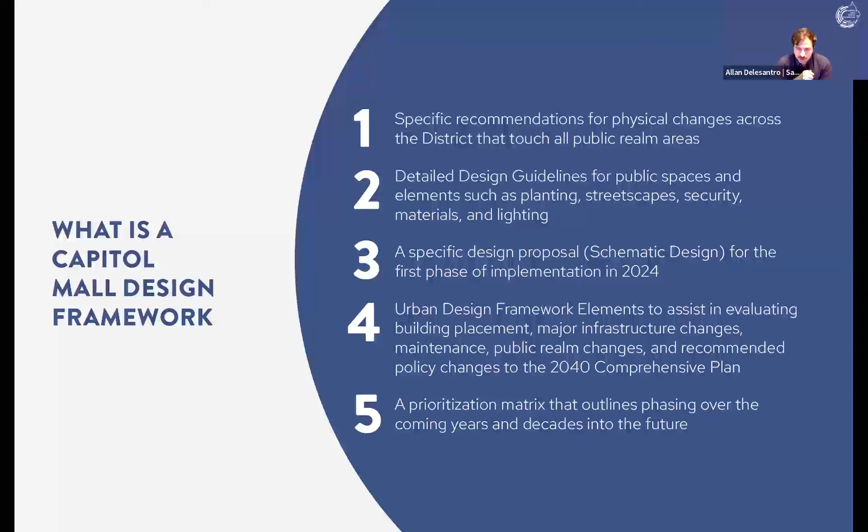We had spent most of our first phase, task one, learning and creating, working with local community members, government agencies, and our own analysis of the site to develop preliminary concepts.

We then took those concepts, presented them to the CAP Board, and got preliminary approval from them. We're now in a phase of showing those concepts to the state of Minnesota, to the community, and getting feedback from them through a survey that is now live.

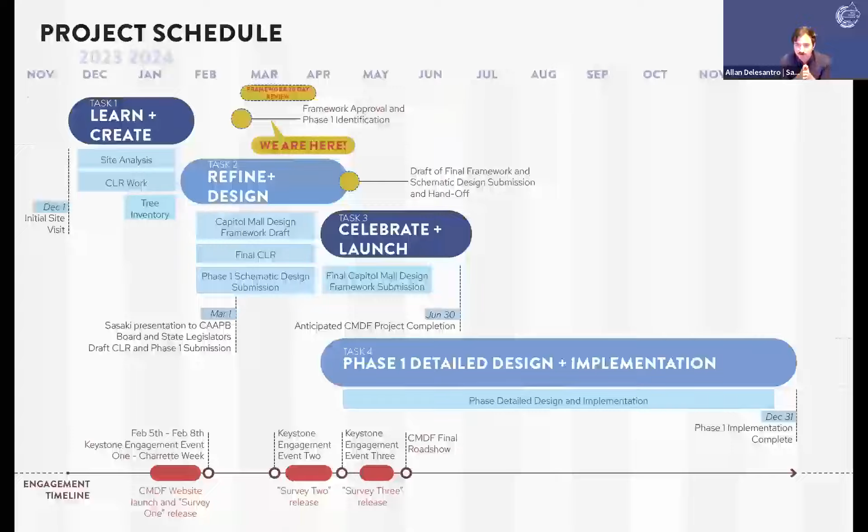This meeting that we're doing today is one of many meetings that we've done over the past couple of months to gather feedback and to better understand this place and how we can improve it.

So the engagement that we've been doing has many layers. We have been working statewide through surveys, a website, and youth engagement that will be going out to schools. We have regional engagement that has included pop-up events in the Twin Cities and other cities throughout Minnesota, like Bemidji, Duluth, Rochester, and Willmar.

We're also doing citywide engagement events within St. Paul and working closely with government agencies and local community members in design charrettes and focus groups. This is some images of those things we have been doing over the past couple of months.

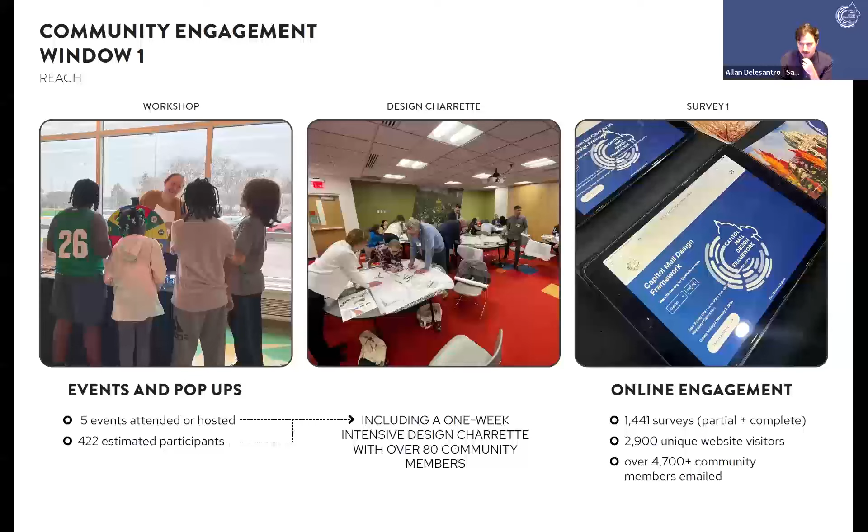We launched a survey in January, which got over 1,000 responses. That survey is closed, but we have since launched another survey, which you are all encouraged to take as soon as you're done with this virtual town hall.

These are some pictures from our community design charrette, which was an opportunity to work directly with community members in the Minnesota History Center, where we were iterating rapidly through different ideas, concepts, and solutions to the challenges that the Capitol area faces.

We need to activate it in better ways to make sure that it is lively through a changing seasonal cycle, as well as a day-to-night or weekday-weekend cycle. And we want to grow, meaning to add more plants, species, and just encourage a greater diversity in the ecosystem of the Capitol area.

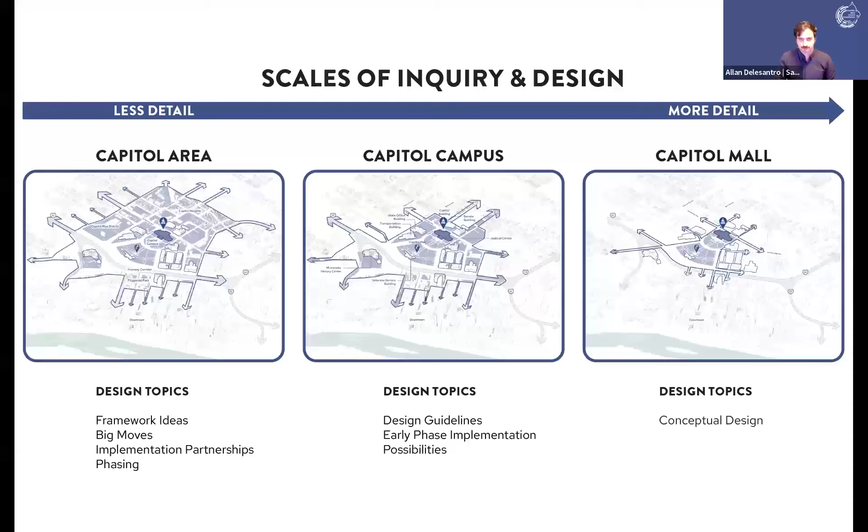We've analyzed this at three different scales, and some of the proposals will feed into that topic. We've developed what we're calling 10 bold moves, ranging from very site-specific, targeted interventions in the Capitol Mall or different areas of the outdoor landscape, to recommendations affecting the entire Capitol area—ways to better connect and unite this district in a holistic, functional way.

Now I'm going to walk you through those 10 bold moves. At the end of each bold move, we'll do a quick exercise where we'll ask you to answer a question that will pop up on your screen. That feedback will help us understand what you thought and how we're doing. At the end we'll also do a Q&A, so if there's anything you wanted to cover that we didn't address, feel free to add it to the Q&A.

One observation we made early on about the Capitol Mall, which we also heard from many community members, is that it's not very user-friendly. There's a lack of signage at a human scale, not a lot of food and beverage options, or really places to sit, relax, and get one's bearings. So we looked at a solution involving a holistic system of user experience elements that make it welcoming and user-friendly for visitors and current workers to get around the Capitol campus, use its outdoor facilities, and appreciate its historic and educational assets.

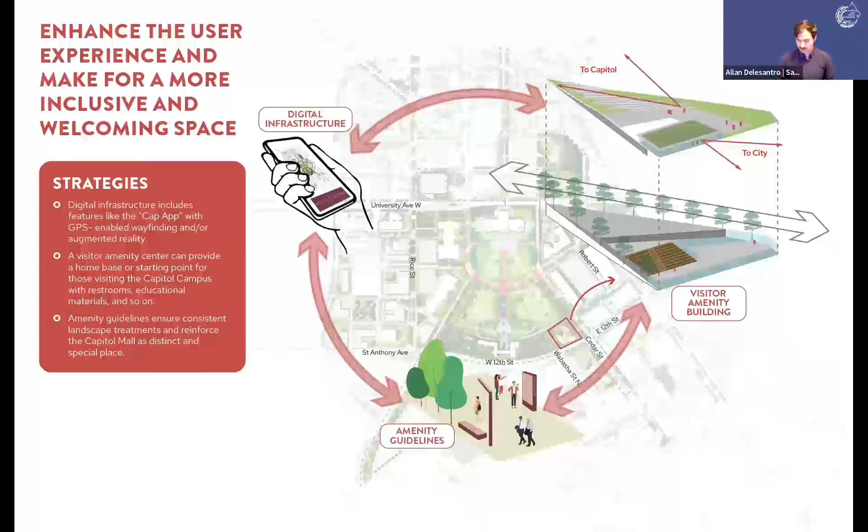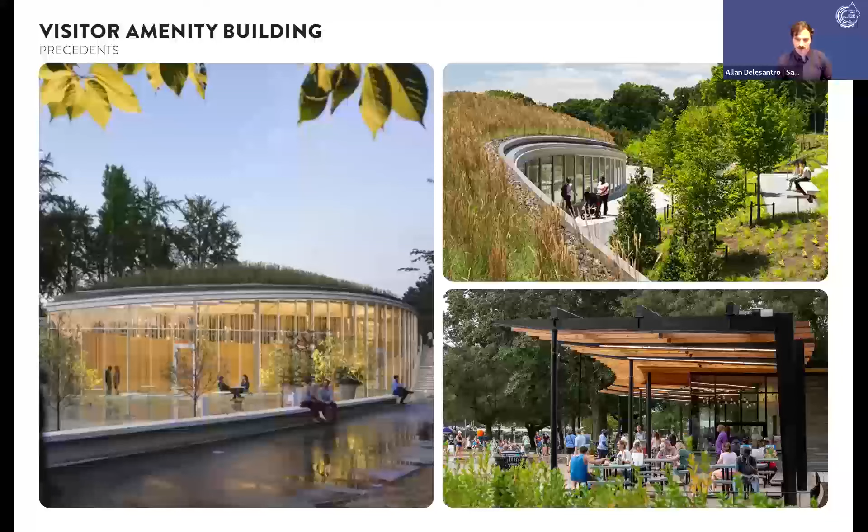This consists of three layers. One is a visitor amenity pavilion—a small place with restrooms, a cafe, and maybe an ambassador who welcomes people to the Capitol area, helps them get their bearings, and provides information about the different destinations on the Capitol grounds.

Another layer is signage and site amenities—wayfinding signage, as well as signage that helps you understand the history of this place and what's happening here today. How is the government functioning? What is the significance of Minnesota's capital?

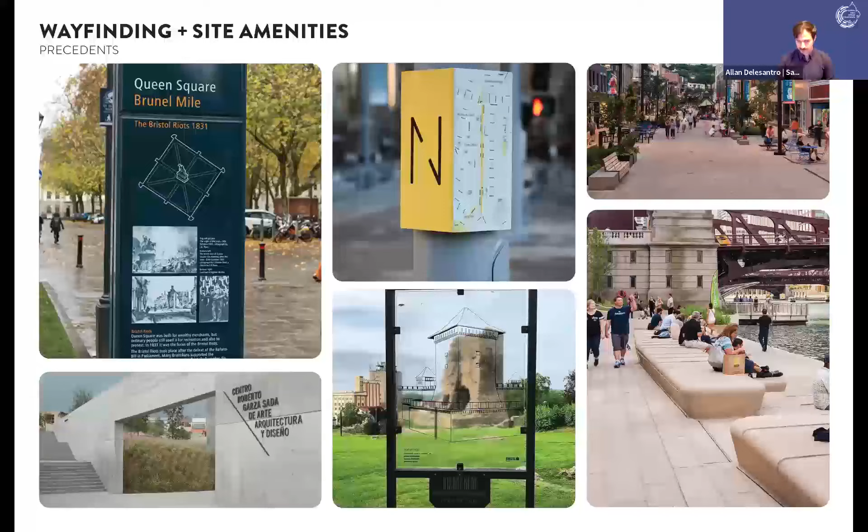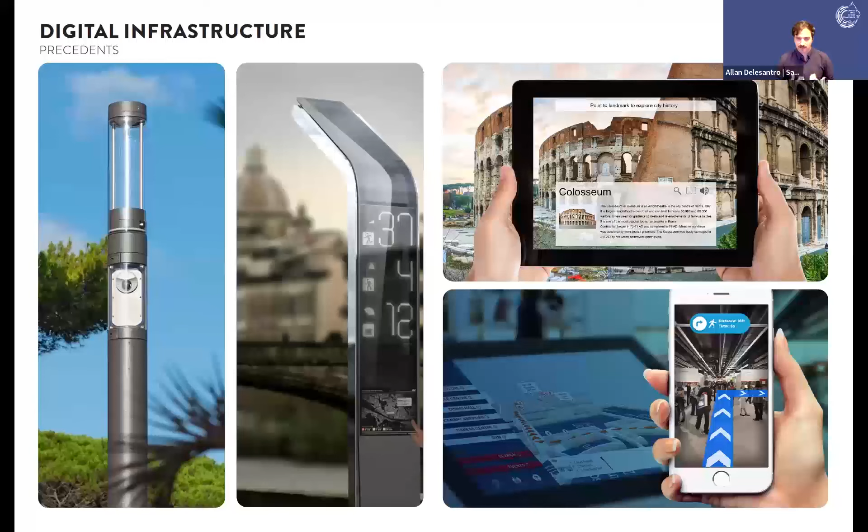And another layer is digital infrastructure—ways to interact with the Capitol Mall through your phone or iPad, or signage that changes to reflect seasons or events.

So here's the first question: which of these visitor experience improvements do you think is the highest priority for near-term implementation in the Capitol Mall?

We'll give everyone about 10 more seconds to answer the question. Okay, great—it looks like people are really excited about the visitor pavilion idea, as well as a couple people interested in the wayfinding signage and interactive, educational signage. That's great, so we'll move on.

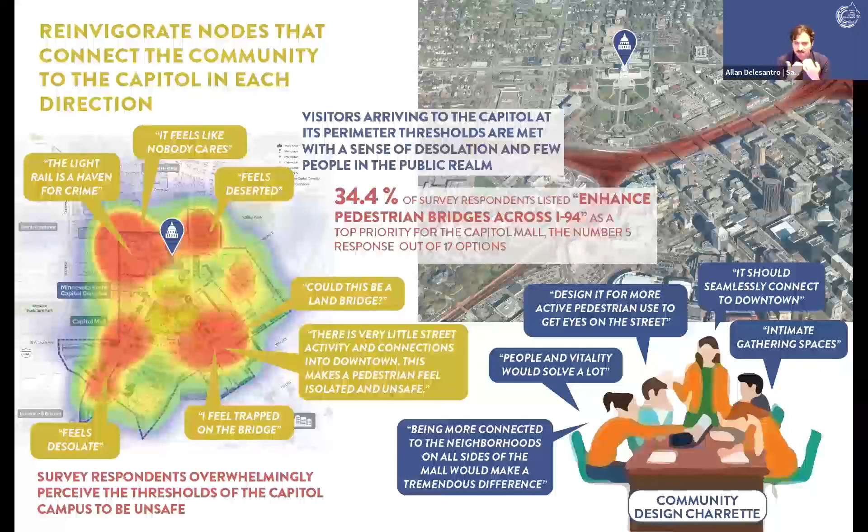So the solution we've developed is a series of nodes surrounding the Capitol area—entry points where people arrive by transit, car, bike, or pedestrian paths—making sure those are alive, vital, and welcoming, sending the message that this is a place we want to be proud of and that all Minnesotans are welcome here.

So I'll just run through these. There is the Cedar and Wabasha deck node. This is a connection across I-94 from downtown St. Paul to the Capitol Mall, achieved through a deck over I-94 that leads to the History Theater and the Minnesota History Center, where we're envisioning a welcoming plaza out front.

From this point, you can enter into this whole zone of destinations, really high profile visitor destinations, including the cathedral, the history center, and of course all the Capitol destinations. The Sears lot, which currently is an abandoned Sears building and parking lot, is a potential area for redevelopment.

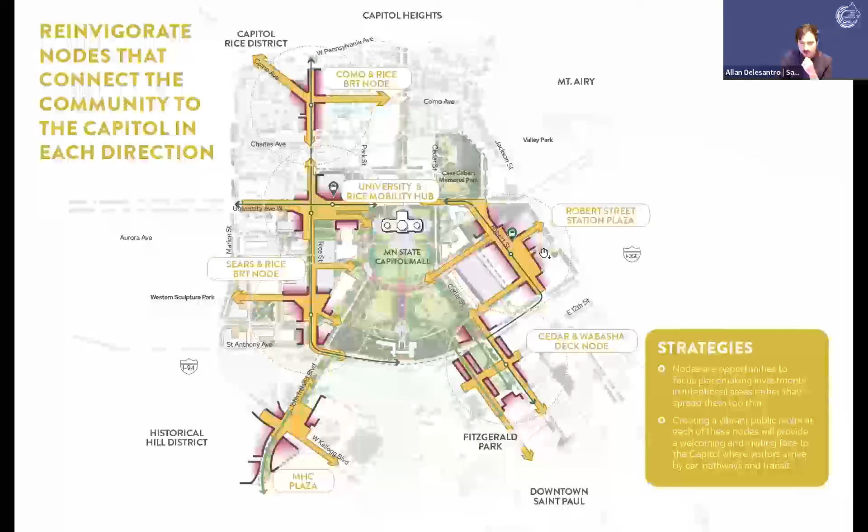University and Rice is where there's currently an LRT stop. Como and Rice will have a future BRT, or bus rapid transit, stop. And Robert Street Station is again another LRT stop. So one example of what we can do is the University and Rice Mobility Hub, which is where the Rice Street bus route will intersect the University Avenue light rail route.

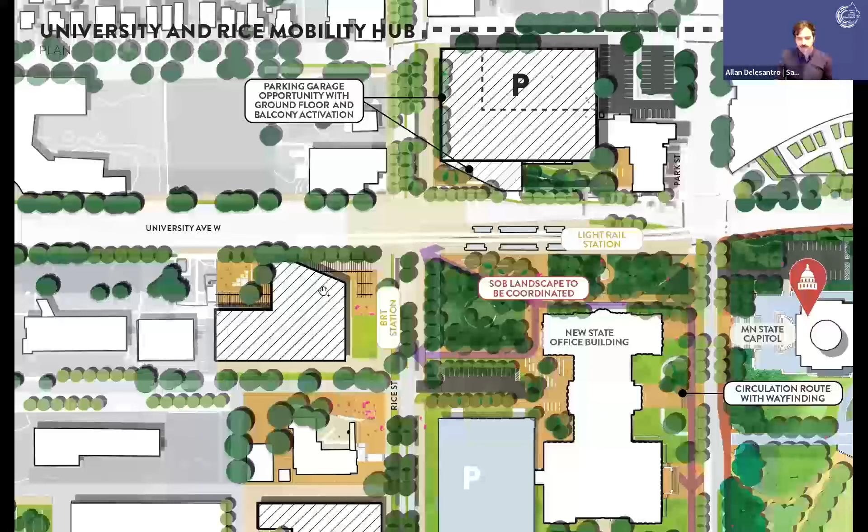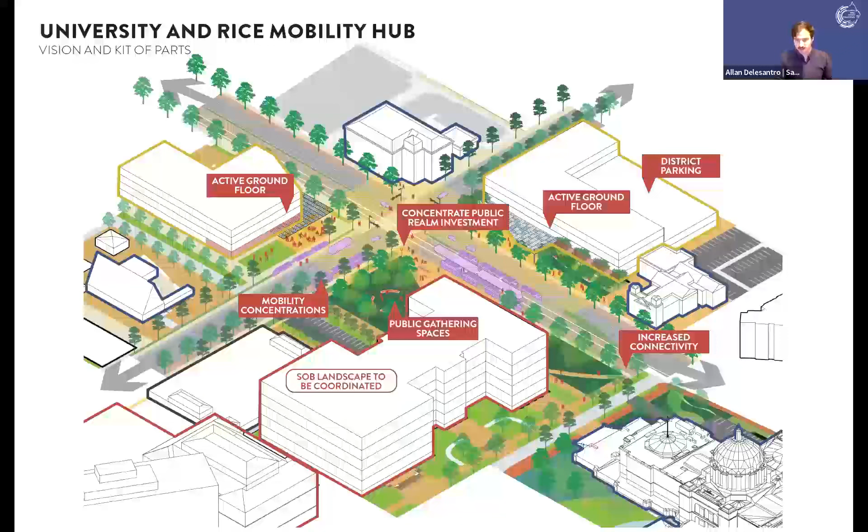We want to make sure this feels like a lively place. A lot of people will be entering the site here, whether by bus or train. Our proposal is to encourage new buildings on either side of this intersection to complete and enclose it, bringing life through new activities on the ground floor, as well as an elevated design treatment to the landscape and paving that makes it feel like an intentional, welcoming place people have invested in. We want people to stay here, to linger and enjoy the businesses and parkscapes it has to offer. Here are some images of what that could look like.

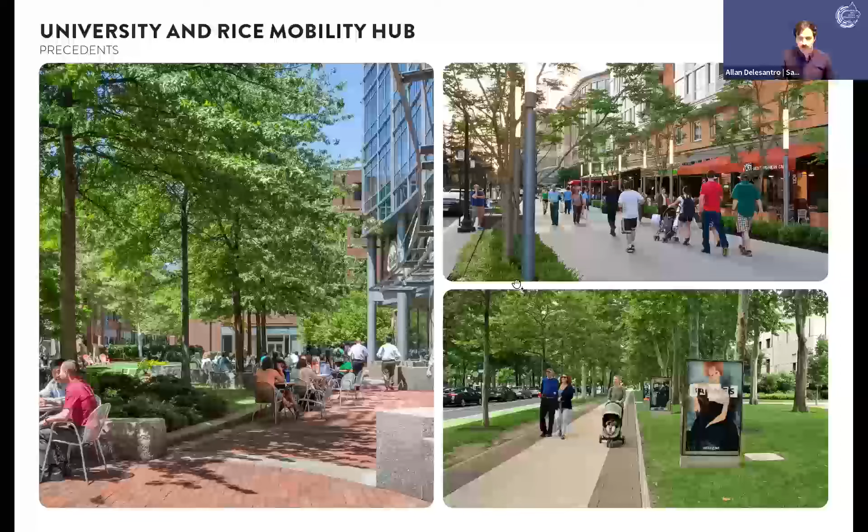Bringing people out into the space, having businesses along the ground floor that encourage people to use the outdoor space through cafe seating, for example, and making it more comfortable through trees and a nice paving design.

So our poll here is, of those nodes I mentioned, which do you think is a priority to revitalize and reconnect the edges of the Capitol campus? We'll give it 10 more seconds. I know it's hard to choose just one.

So it looks like Sears Lot redevelopment won in that poll. That's great. That's definitely a great opportunity to bring more businesses, potentially housing, as well as a feeling of safety and connectivity across that connection between the Capitol Mall and the neighborhoods to the west.

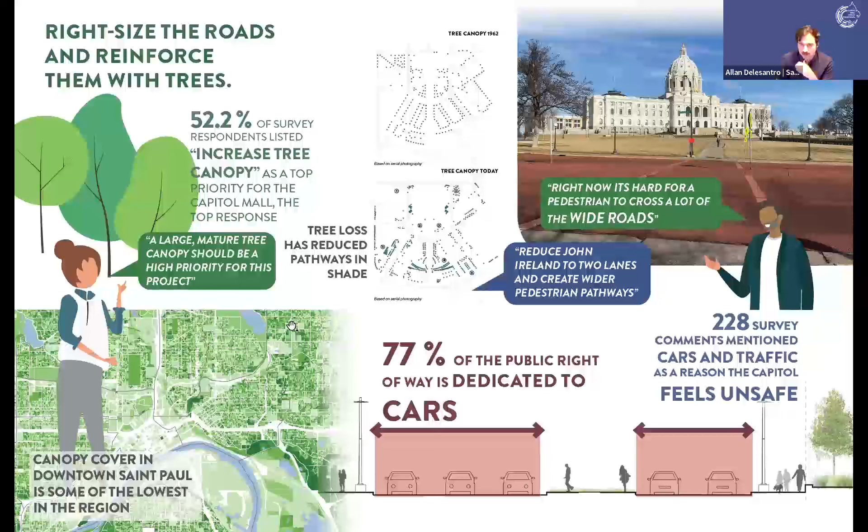So what we've suggested is to take a look at all the streets at the Capitol Mall, assess their current level of traffic, and understand if we can reduce the width of the streets to take back that space for pedestrian infrastructure as well as for tree canopy.

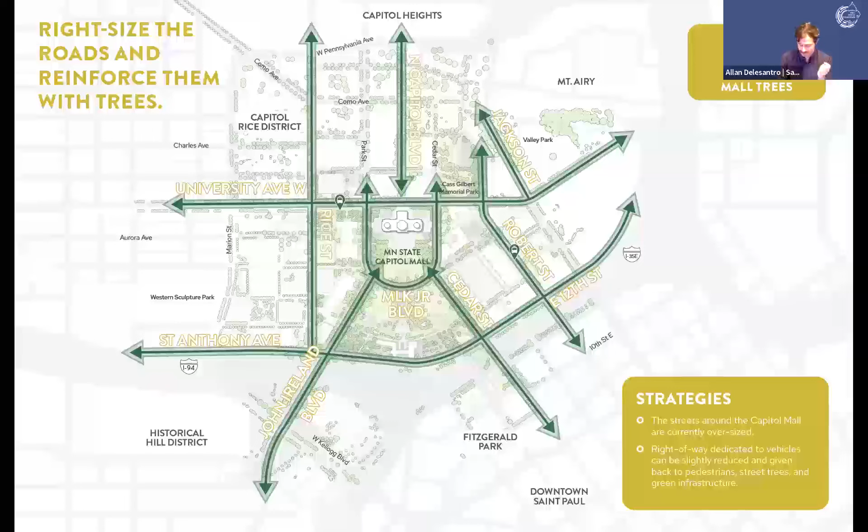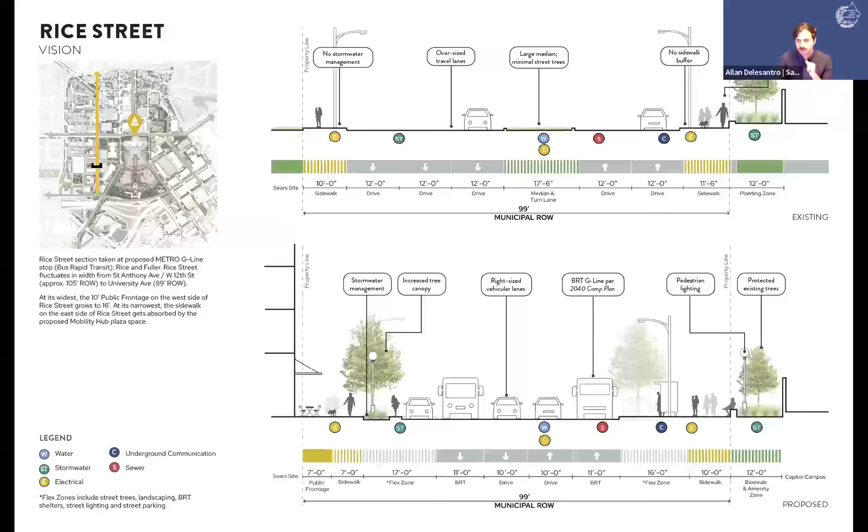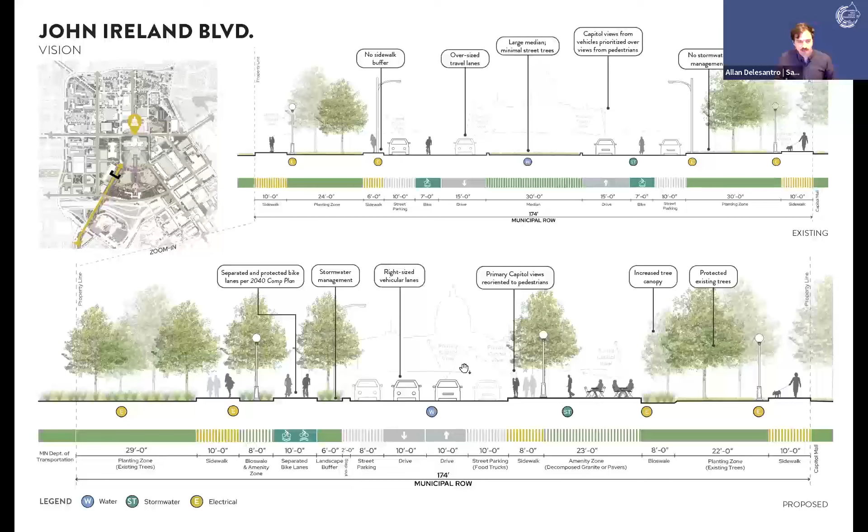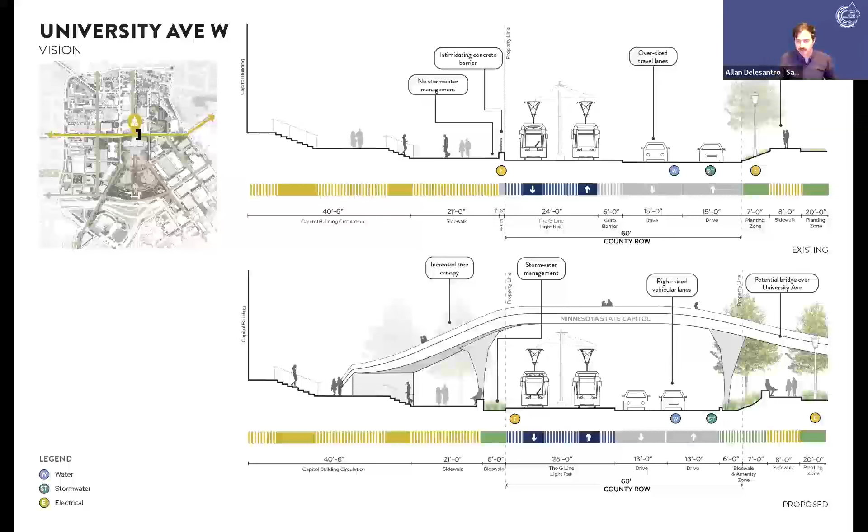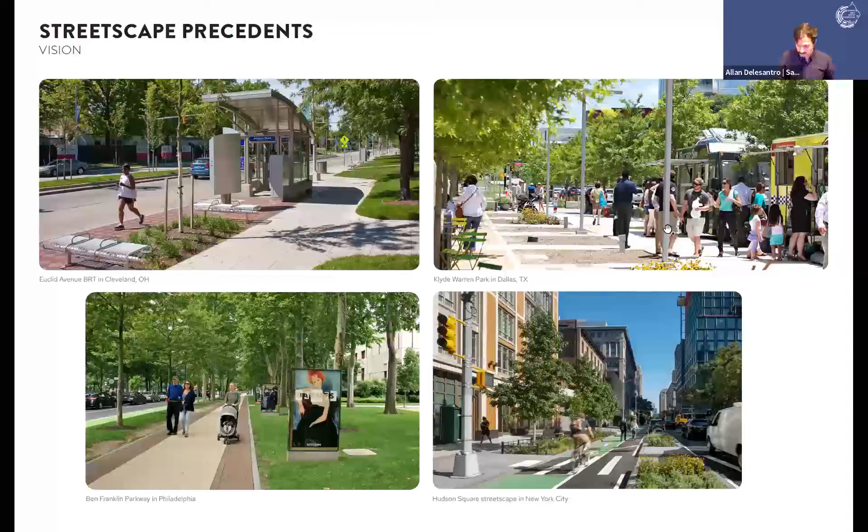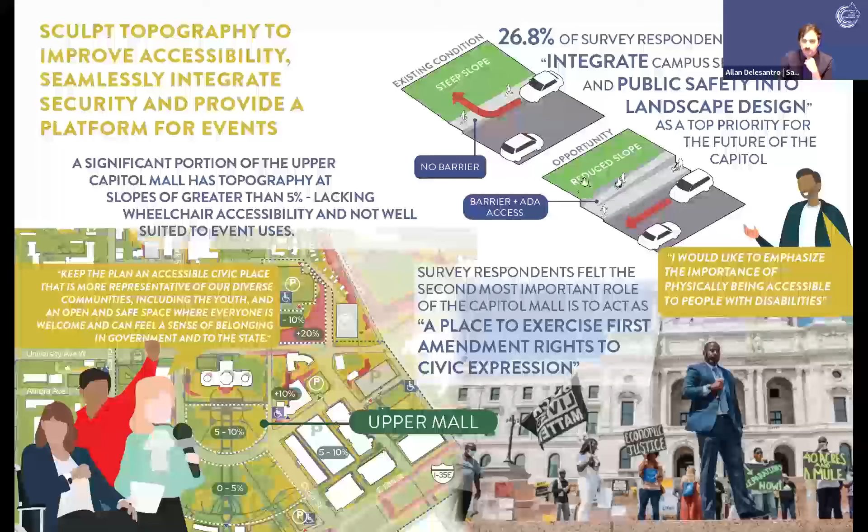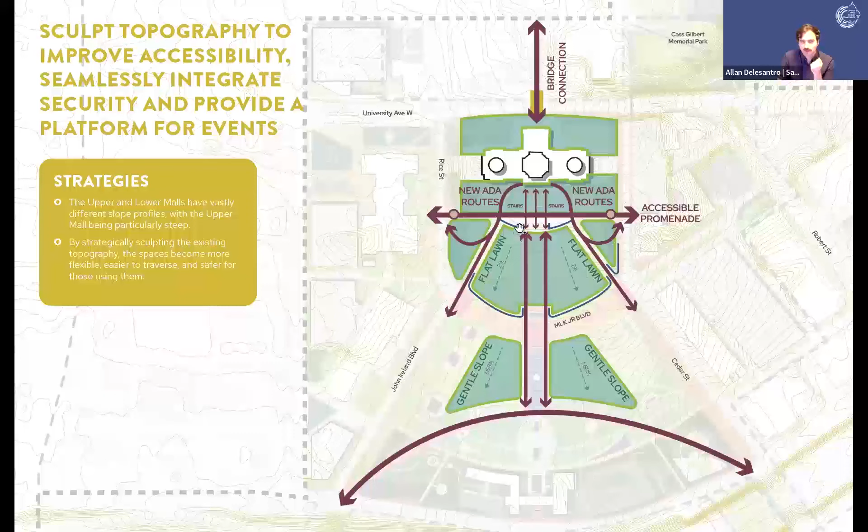So those two goals together are an opportunity to rethink and sculpt the topography of the upper and lower malls, to seamlessly integrate a security feature, a low seat wall on the south side shown here in blue, and to reduce the slope enough that people can use a wheelchair and gather for events without it being too steep.

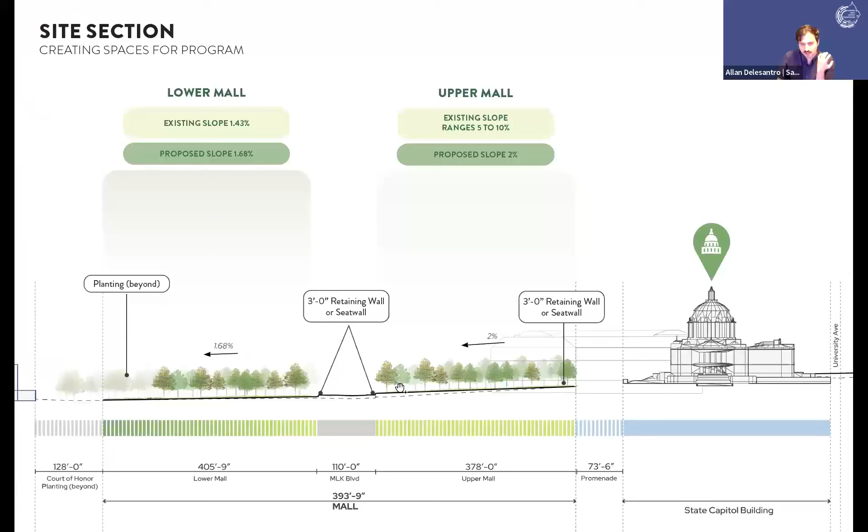But as we flatten it out, we need to pick up the difference with a small retaining wall right here. And this is what that could look like.

Next thing we'll talk about is the importance of water. We know that as the land of 10,000 lakes, Minnesota is really culturally tied to its water, and that's central to its identity, so it should be a part of the Capitol experience.

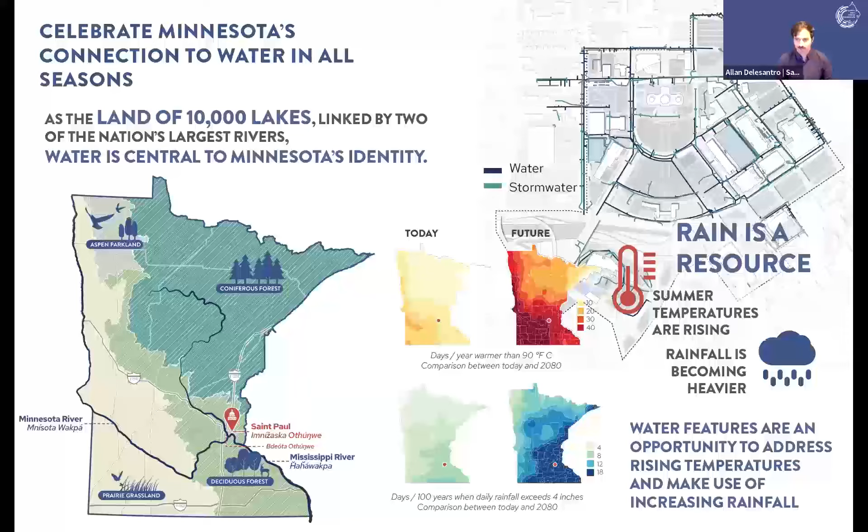We also know that with climate change, summer temperatures are rising and rainfall is becoming heavier and more unpredictable. So we want to look at ways we could turn that rain into a resource to create more comfort in the hot summers. There are two ways we can approach water in the Capitol design framework.

One is to create decorative water features like a cascade, interactive jets, or a seasonal pond and skating location that communicate the symbolic importance of water and can be a seasonal attraction both in summer and winter.

The other way we're thinking about water is in stormwater management. Using the same streetscape improvements I was talking about earlier—taking away vehicular lanes and adding street trees and pedestrian infrastructure—becomes an opportunity also to create rain gardens, gardens that allow us to absorb excess stormwater and prevent it from flowing downstream and causing water quality problems for our aquatic ecosystems.

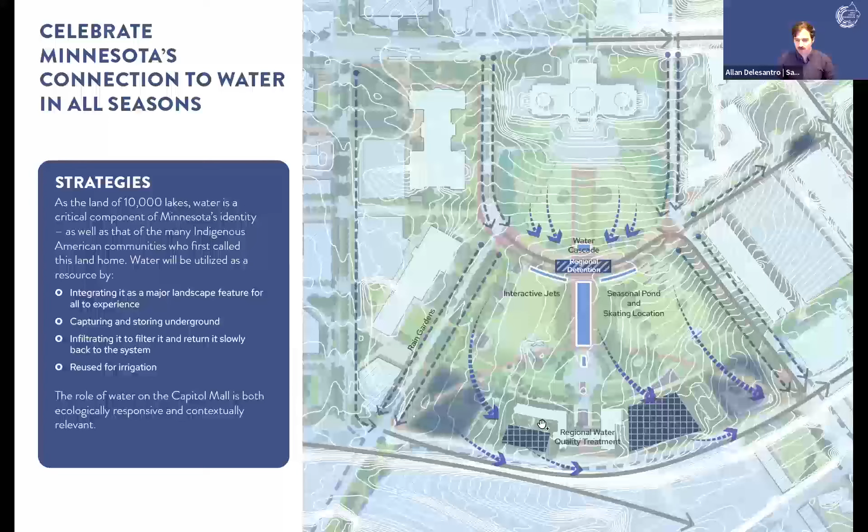That would be paired with underground systems for retaining that stormwater and improving its quality before it flows out of the site.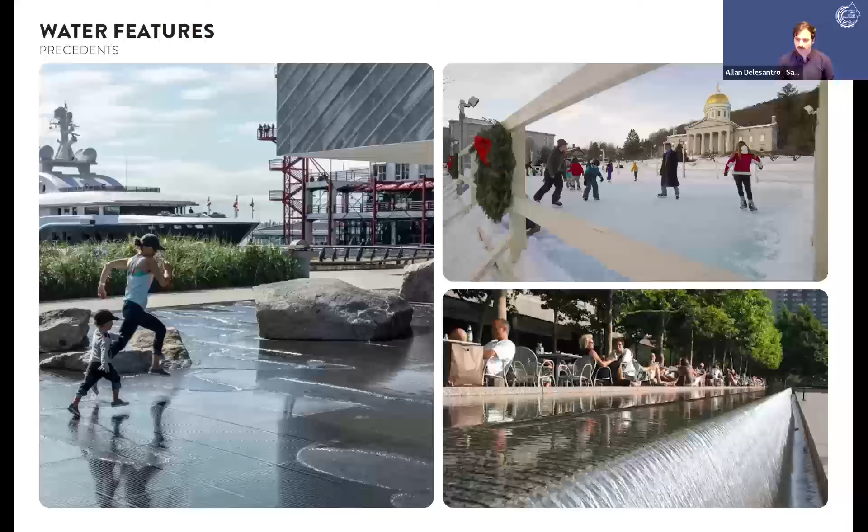Here's some examples of water features. They can be very simple, low maintenance ways of introducing water to the site. They can have a seasonal component with ice skating in the winter, and they can also be incorporated into walls, like I was discussing in the sculpt the topography move, becoming an architectural as well as water feature.

So our poll for this is: of those things I just mentioned, what do you think tells the story of Minnesota and water best? Select your favorite.

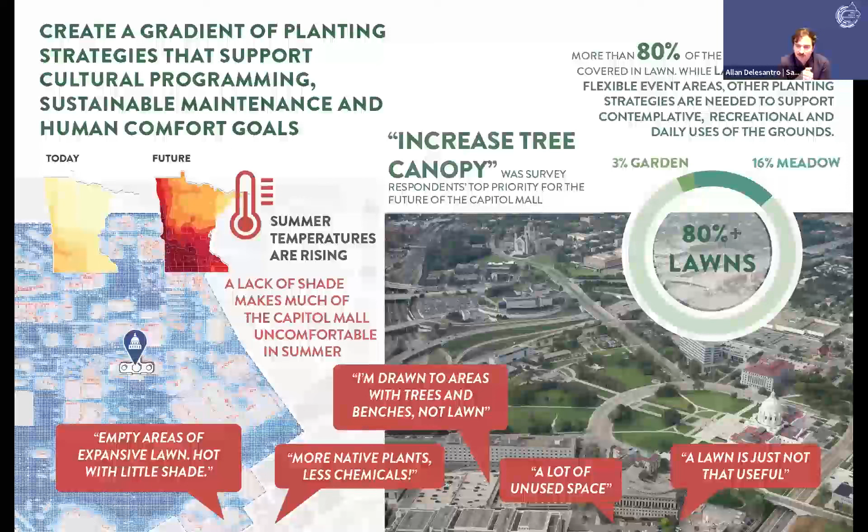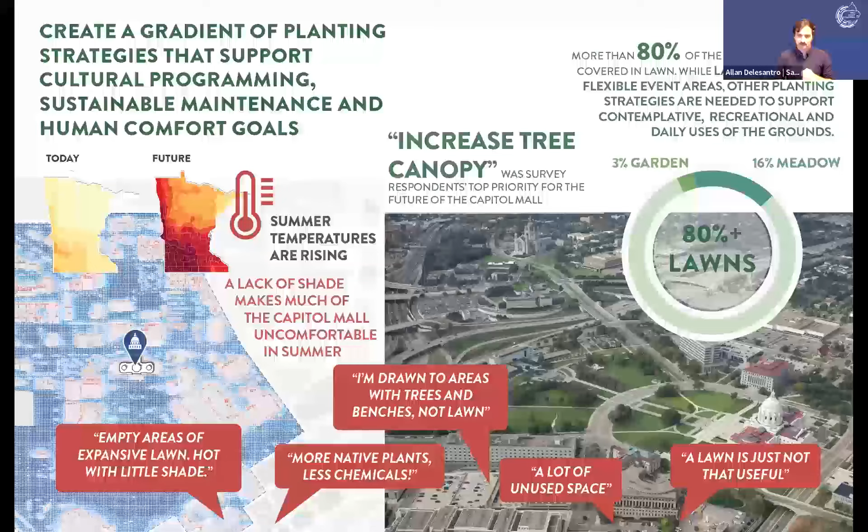Related to that conversation is one about the diversity of plantings in the Capitol area. Right now, about 80% of this area is covered in lawn. While lawn is great for events and has a lot of flexibility, we think this needs to be complemented with different types of plantings. We also know that summer temperatures are rising, and that's becoming increasingly a problem, so having a variety of plants, including trees and shrubs, can help cool down this entire area in the summer.

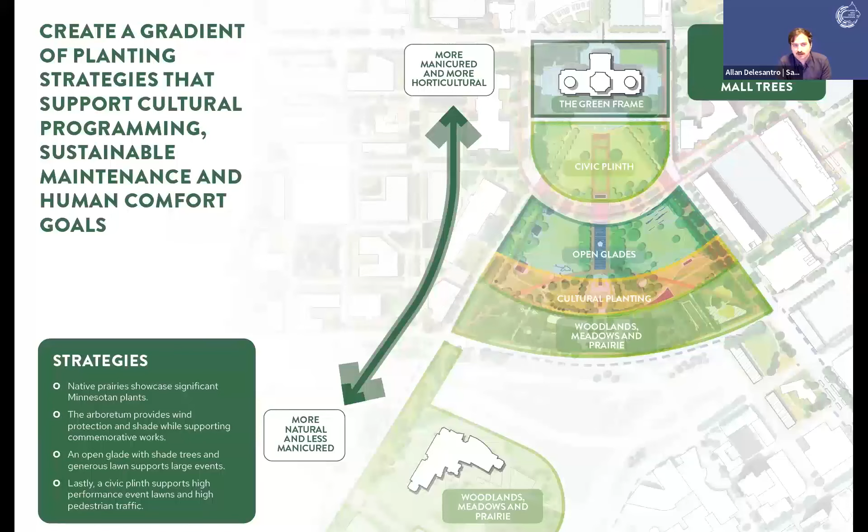What we're proposing here is a gradient of planting strategies that move away from the Capitol Mall, starting at the Capitol building itself with a more manicured and horticultural palette of plantings that respects the architectural character of the building and that sense of decorum and civic nature. As you move away from that, you transition into a more natural, less manicured typology of plantings that references the great ecosystems of Minnesota, like prairies, woodlands, and glades.

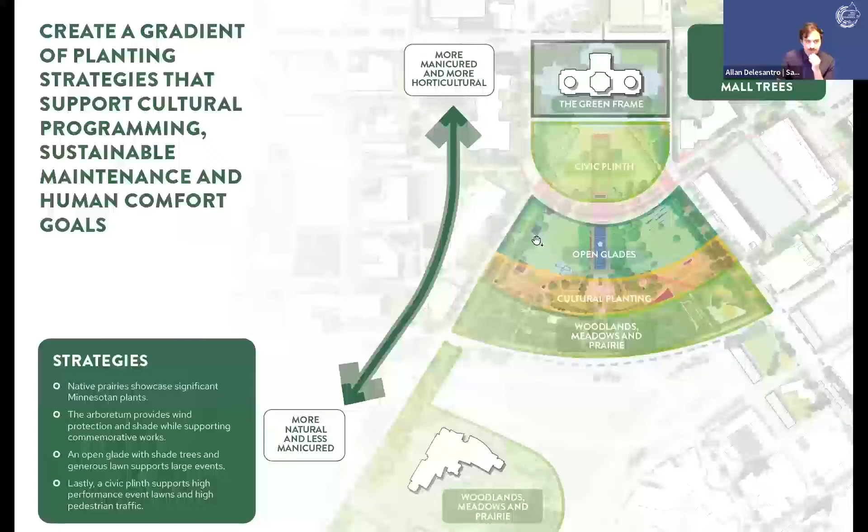As you move away, you can have transitional zones that are still mostly lawn, allowing gathering, but around the edges of the lawn and around trees, you can have drifts of shrubs, grasses, and flowering plants that add a little bit of interest and diversity to the landscape.

Then as we move further away from the Capitol building, there's an opportunity to incorporate things that reference Minnesota's native habitats: oak savanna, prairie, and low-mow lawn areas.

Our poll here will ask you to look at images of these different typologies and rate them from 0, you don't like them very much, to 5, you like them a lot.

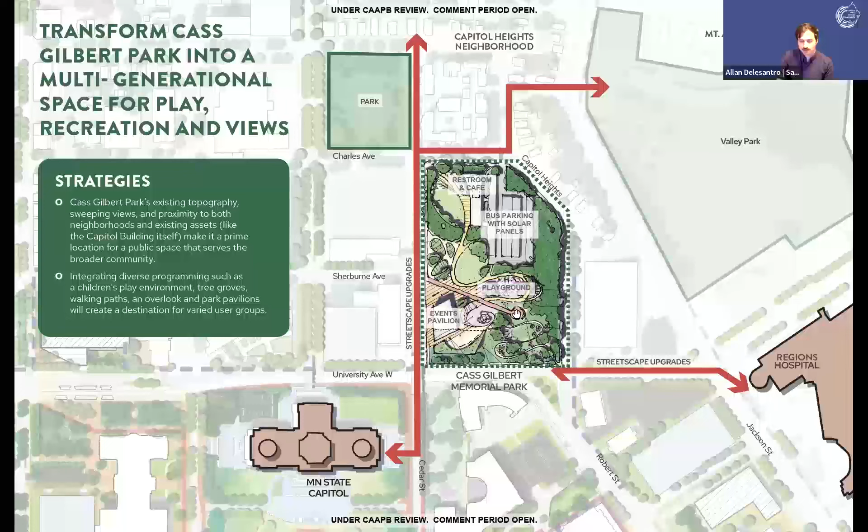So this is Cass Gilbert Park, northeast of the Capitol building. Right now, all that's really there is this path and this overlook, which is this small circle, as well as a very large parking lot.

We're proposing to reduce that parking lot and make it more intentionally dedicated to bus parking for groups and school groups, then create the amenities those school groups and school-aged children will need during their visit, or if they just live nearby. That includes a restroom, food and beverage opportunities, picnic tables for lunch during a school trip, as well as areas to play and integrate play into an educational experience.

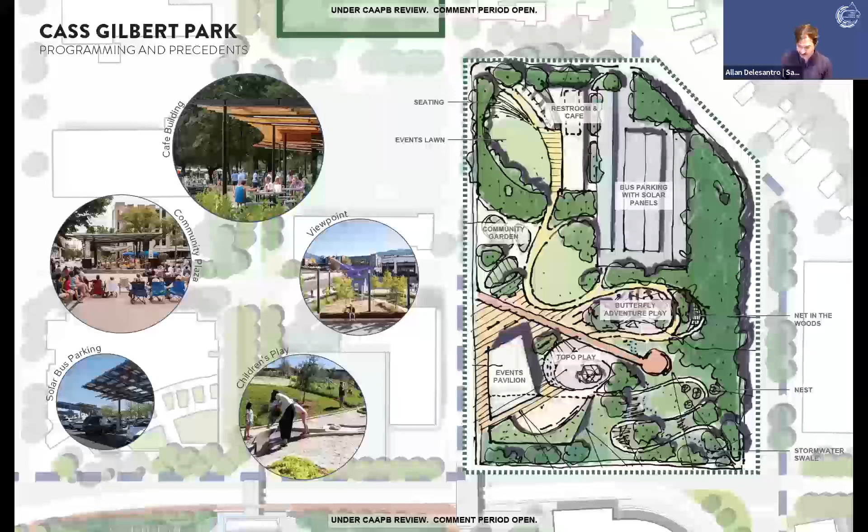This will become an asset, not just for school trips, but for families in the entire area, and hopefully even become a destination where families in the region want to come specifically to play and learn a bit more about the Minnesota Capitol.

So here are some more features there. I think one thing to highlight is the idea of multi-generational play spaces, so young children and older children can come and have different experiences.

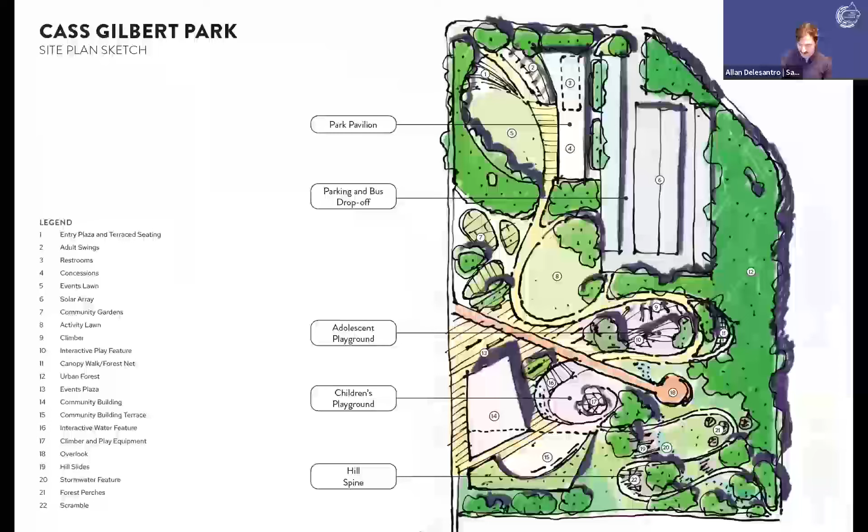So our poll here is an open-ended question. We want to know what is an element you would like to see in Cass Gilbert Park, and we'll take your suggestions and think about if we can integrate them into this design.

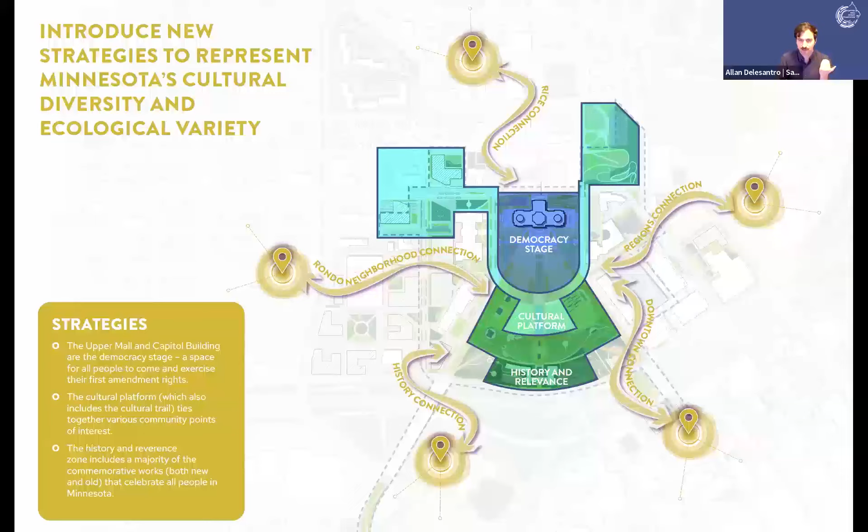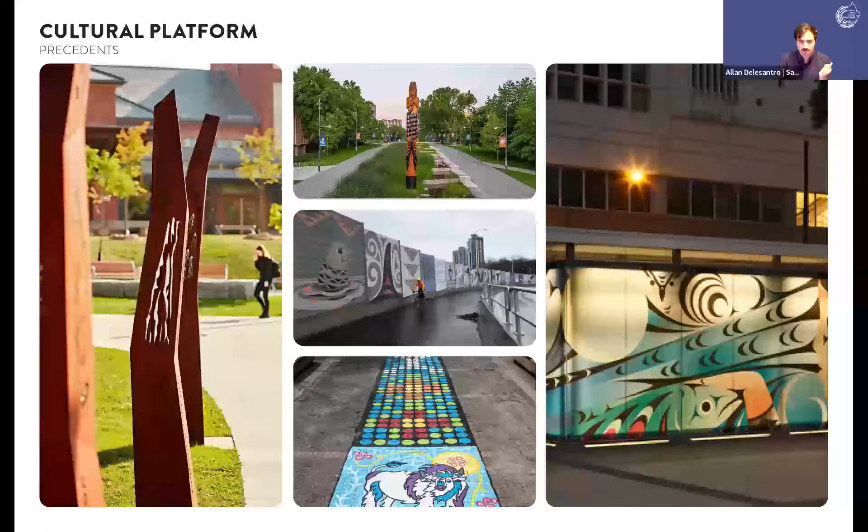As you move towards that cultural platform area, there are opportunities for rotating art exhibitions integrated into walls and pavements that reflect today's cultural ideas or underrepresented voices. In the history and relevance section, we identify a need to add more commemorative works over time, with guidelines to ensure those works respect and work with the landscape. Ideas include a commemorative memorial that works with the topography, or something integrated into the walking experience, as well as ways to integrate memorialization and information into pavements or furnishings.

This relates to the idea of a cultural walk, a kind of horseshoe that goes around the Capitol building in the area most visible to it. What's exciting about this idea is creating a one-stop shop experience for visitors to see all the different seats of Minnesota's government: the executive branch with the governor, the legislative branch with Senate and House, and the judicial branch at the Judicial Center.

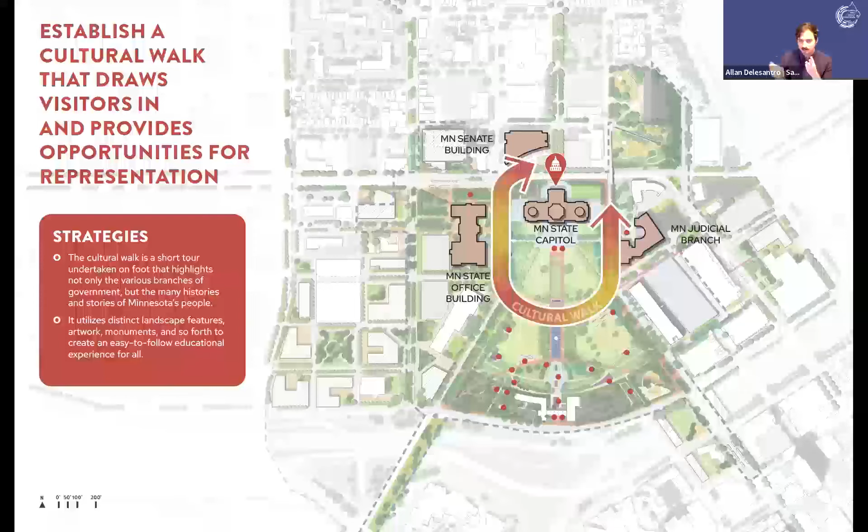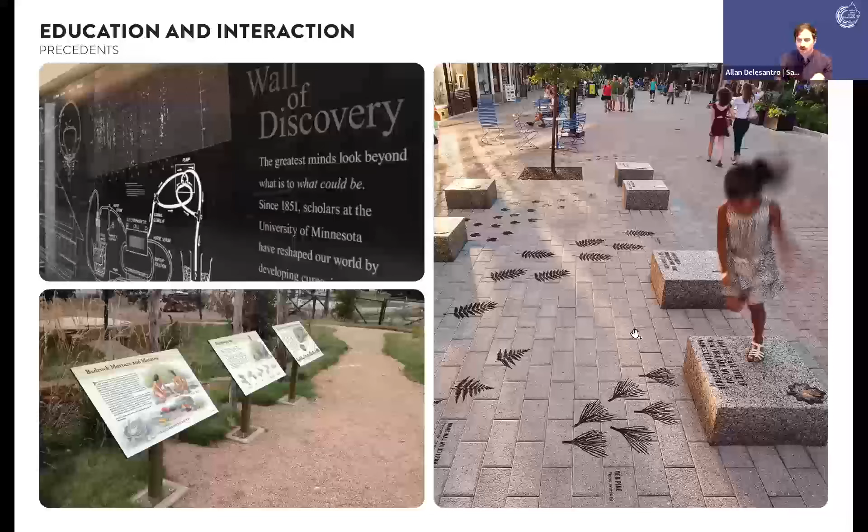This could become a heart for expressing Minnesota's ideas today, with exhibitions and signs. We're interested in incorporating flags of the tribal nations in Minnesota here, as well as temporary artworks. We can also work within the paving and signage to incorporate information about Minnesota's government, providing an educational experience that doesn't clutter but becomes an integral part of the walk.

So the question we want to ask about the cultural walk is, what kinds of stories do you think we should tell on this cultural walk? Understanding there'll be many stories over time, what are the things you think are missing that we could tell?

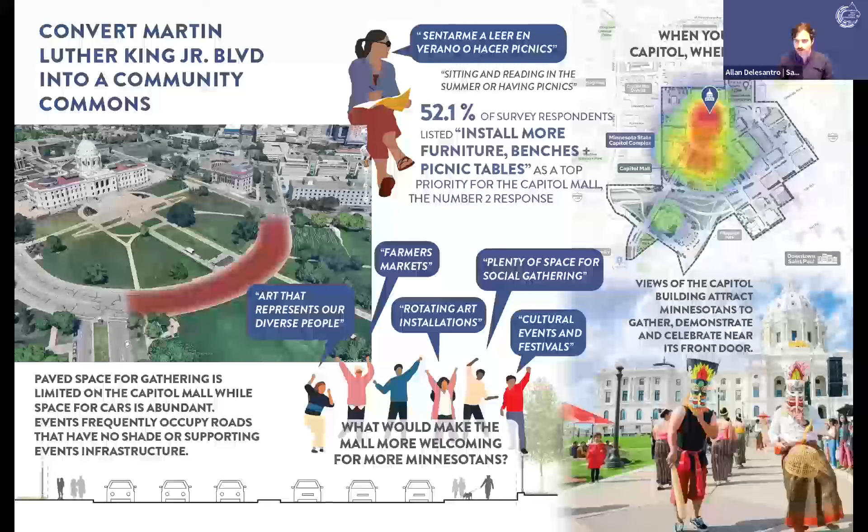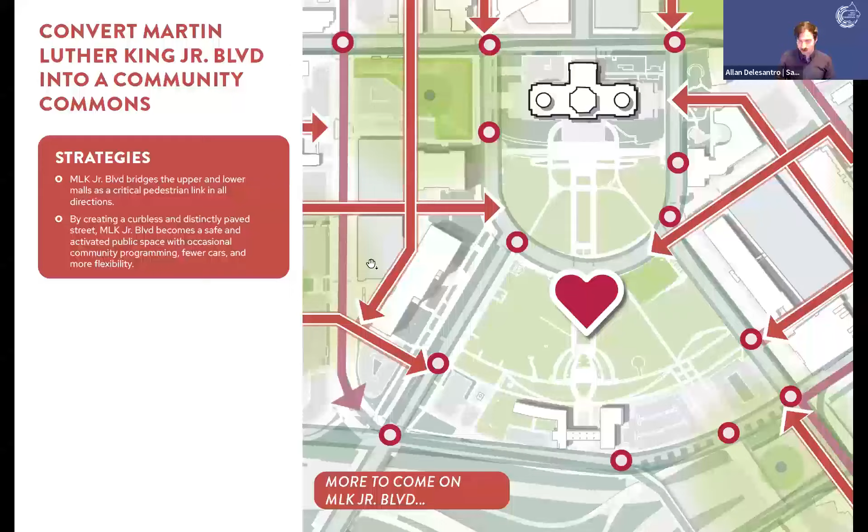We heard from more than half of people in our survey that more furniture, benches, picnic tables, and places to sit and enjoy a daily recreational experience is something really lacking in the Capitol area right now. We want to bring those ideas together to create a heart for the Capitol area where people can gather, intentionally designed to support events. Our concept is to reduce vehicular lanes, create a curbless street that discourages pass-through traffic unless people need to be there, prioritizing the pedestrian experience and making it porous for pedestrians to move between the upper and lower malls.

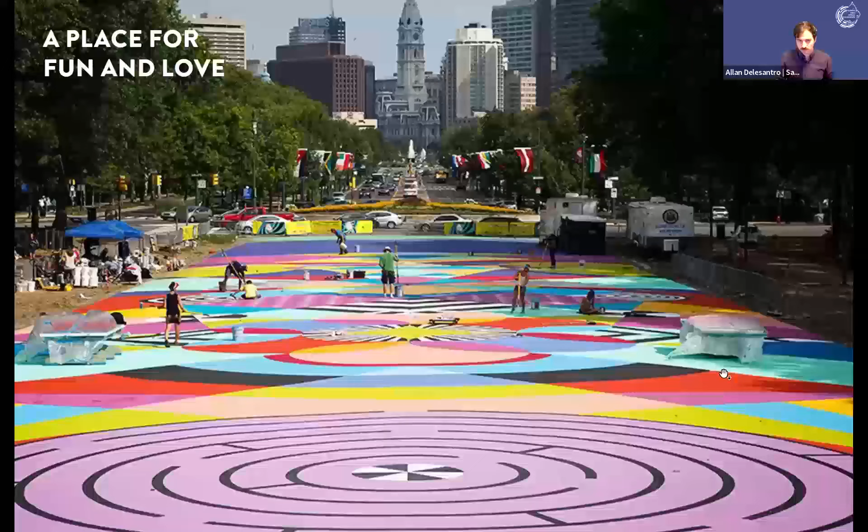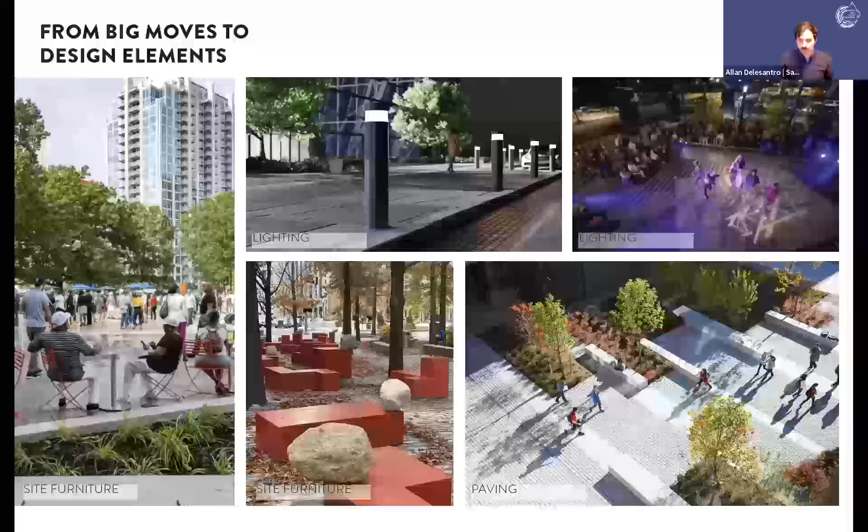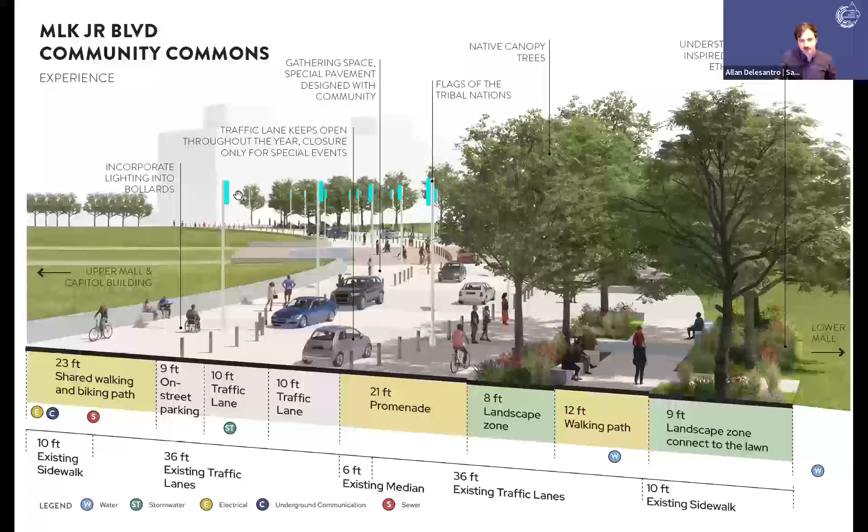This is a great opportunity to have art integrated into the pavement, maybe as a collaborative community project, as well as furnishings and shade trees. The lower mall is on the right, the upper mall on the left, and in this paved area we've reduced vehicular lanes while still allowing traffic to pass through if needed. We've created a space for the flags of the tribal nations in Minnesota, shown here in blue, plus space for pedestrians to gather, sit in the shade, and plantings that could have symbolic meaning for Minnesota.

With this new community commons, we want to ask you: what kinds of programming or activities would you most like to see in this new community space? What would excite you?

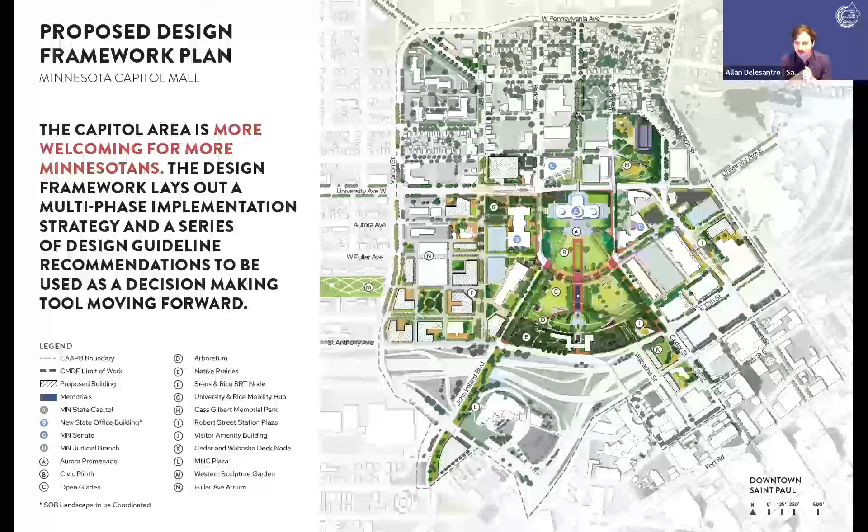These projects won't happen all at once. And so this framework plan becomes an opportunity to set and share a common vision so that as people pursue individual projects, say a building project at the Sears lot, or an improvement at the light rail station, or the addition of community features or amenities at the gateway, at the thresholds of the site, then we can allow those to all contribute and start adding slowly to reach this vision. So over time, these things come together and they feel intentional and part of one shared vision.

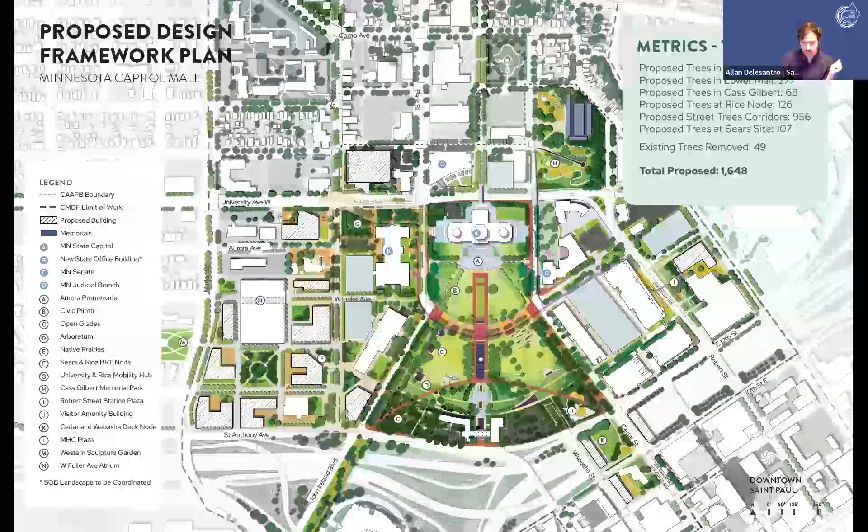All this information has gotten us to this point. We still have a couple more months of working on this design framework left. We're here in March. We will be publishing this design framework in June, and then we'll be moving into phase one of implementation.

And that phase one project that we're looking at right now is the Reverend Dr. Martin Luther King Jr. Boulevard Community Commons. We really see that as an opportunity for a catalytic investment that creates a heart to this whole district. And from there, all of our improvements will start to grow and add on to each other.

We'll have continued opportunities for feedback. Survey 2 is in the chat. And if you go to the Minnesota Capitol Mall Design Framework website, you can see links to the survey as well as information about upcoming events.